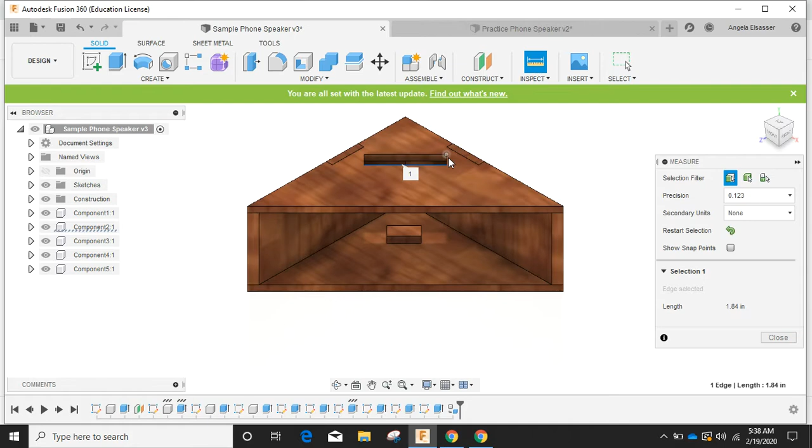Okay, so if I go back to the example, the phone this was made for is about almost 2 inches wide and looks like about 1/2 inch thick. So I'm going to go back into my practice.

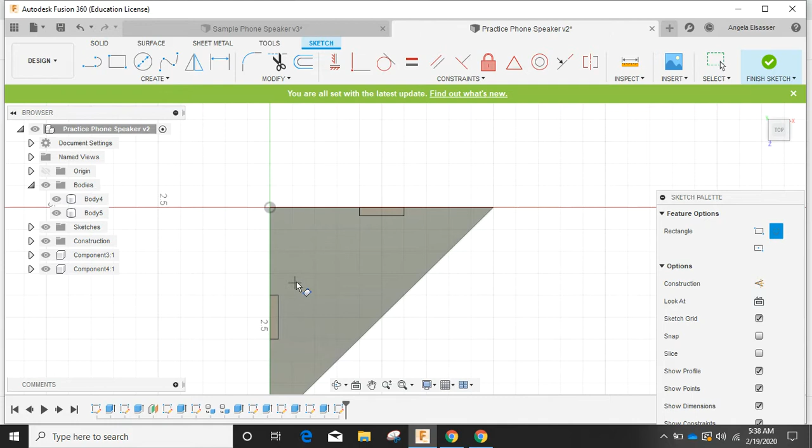I'm going to put a rectangle on the top, and again, I'm going to make a 3-point rectangle. I want it to be 2 inches, and then I want it to be 1/2 inch wide. There we go. There's my rectangle. Now I should be able to, oops, I didn't take my 2-inch dimension, so I'm going to go ahead and put that on there. Now I should be able to move this around wherever I want to.

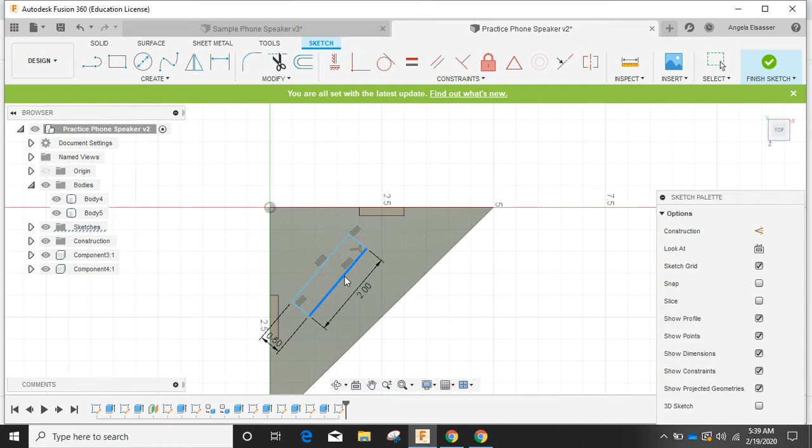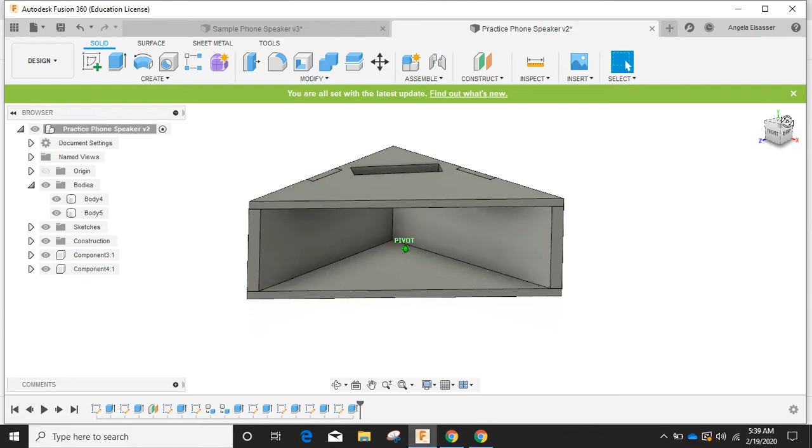And ideally you want it pretty close to the back so that your sound has more room to amplify as it travels to the front. So I'm going to finish that sketch and extrude that down to cut it out. So we've got a hole for our phone. Now we want to create a little notch for our phone to sit on. 'Cause if your phone's like mine, the speaker's on the bottom. Wherever your speaker is, you need to think about that when you're creating your design.

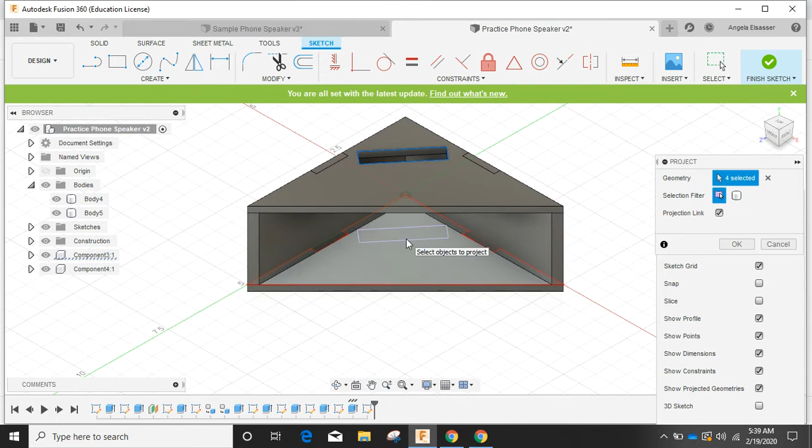So I'm going to put a sketch on here, and I'm going to project this rectangle so I know where my phone is going to be sitting. Now I'm going to come down here. I see that rectangle. I don't want the whole rectangle to be the notch. So I'm going to make another rectangle inside there that is smaller. Whoops, it's giving me a 2-point rectangle. I want a 3-point rectangle again. So I want a small notch right inside that one.

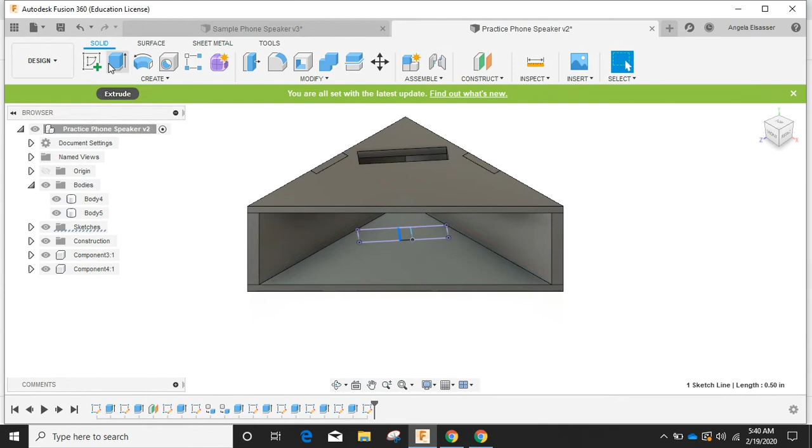And I'm going to make it really small because this is going to be my cutout. So I'm going to finish this sketch and cut that down. So this will be how my notch fits in there. Now I'm going to make these bodies components real quick while I'm thinking about it because they're not components yet. Okay, so I've got 4 components for my 4 faces.

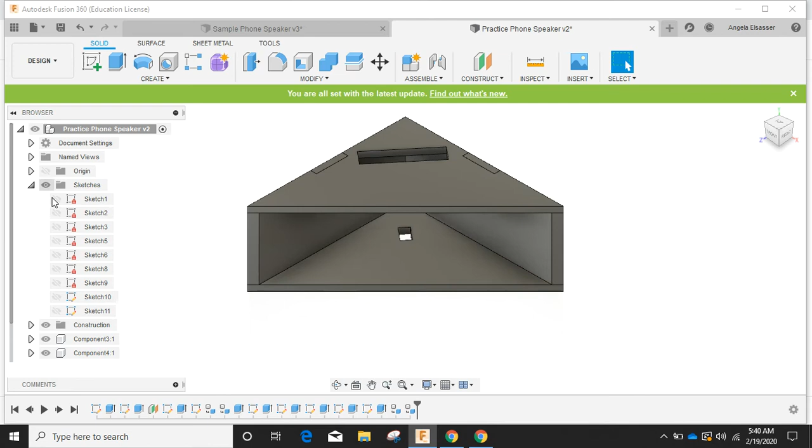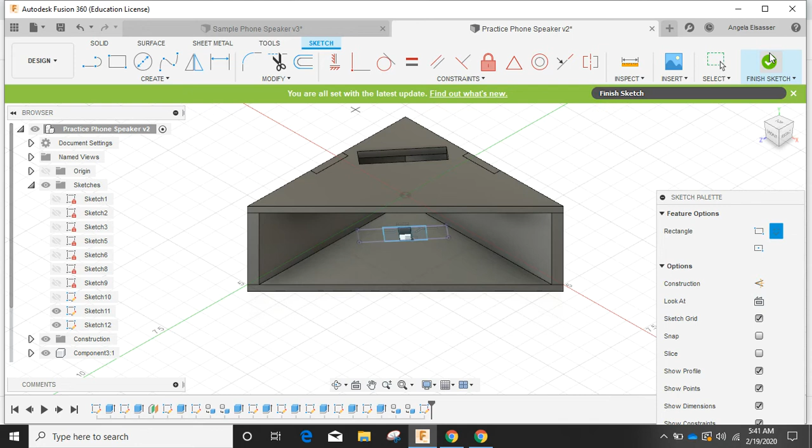Now I'm going to turn that last sketch back on. See how I opened up my sketches over here, and I'm going to turn it back on because I'm going to make another rectangle on that same place that's a little bit bigger. And I'm going to extrude. That didn't work. My rectangle is a little sloppy. I'm going to delete that. Oh, undo. So I will just delete that line.

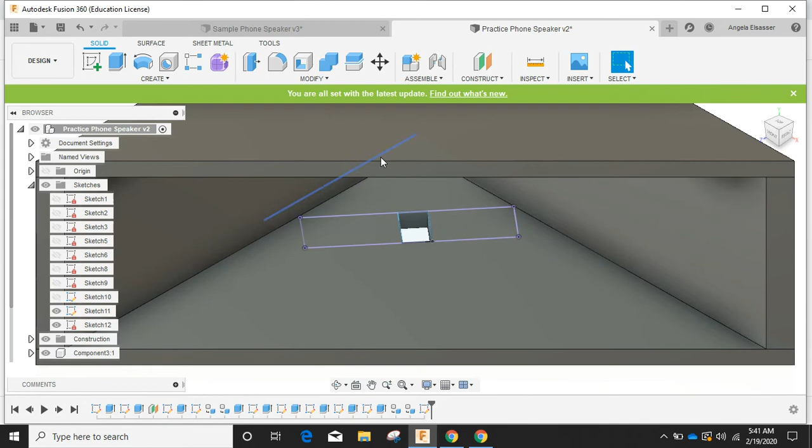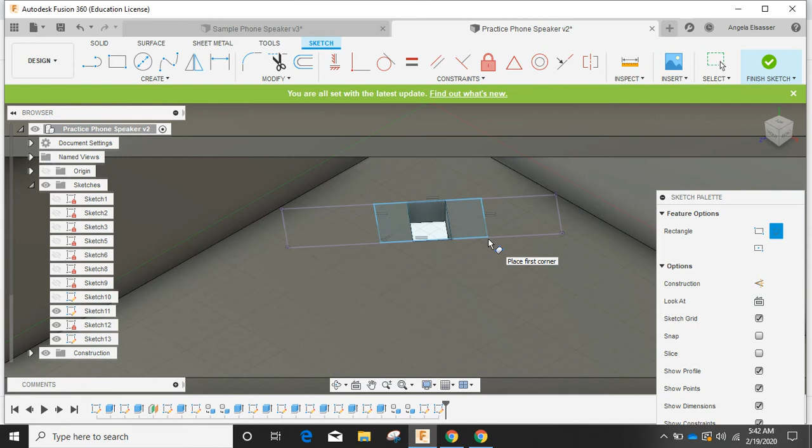And in this sketch, I'll create another 3-point rectangle. And I will extrude it up 3/16 of an inch. It doesn't need to be a whole lot, just enough to get our phone off the ground.

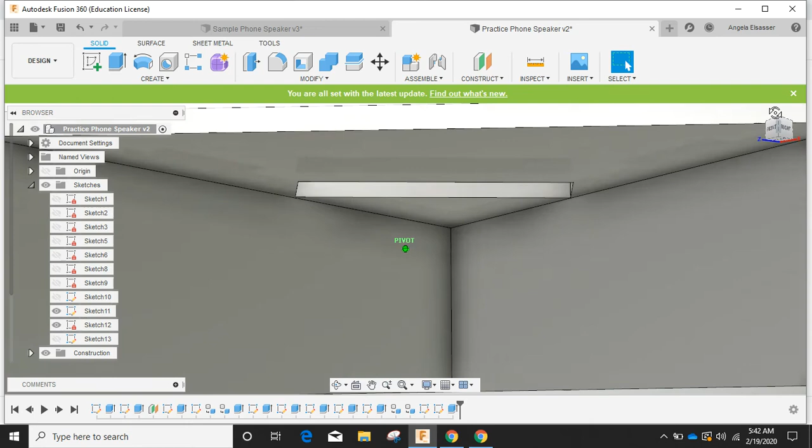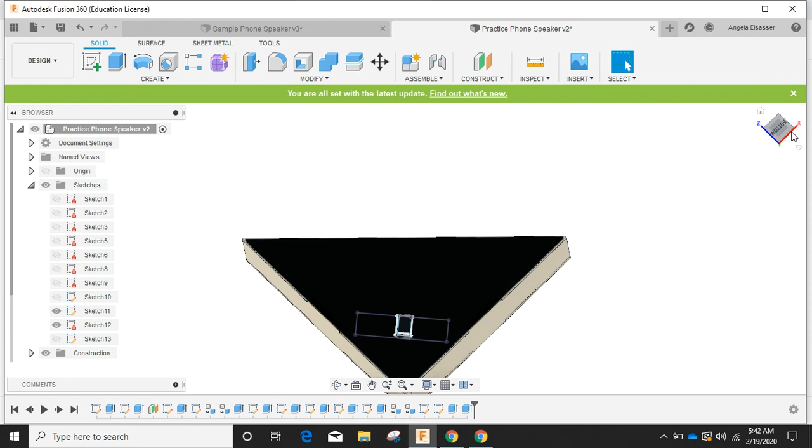And now from the bottom, I will extrude this guy. Also 3/16. Oh, I've got to put a new sketch on there. I want to make sure it gets on this face. P for project.